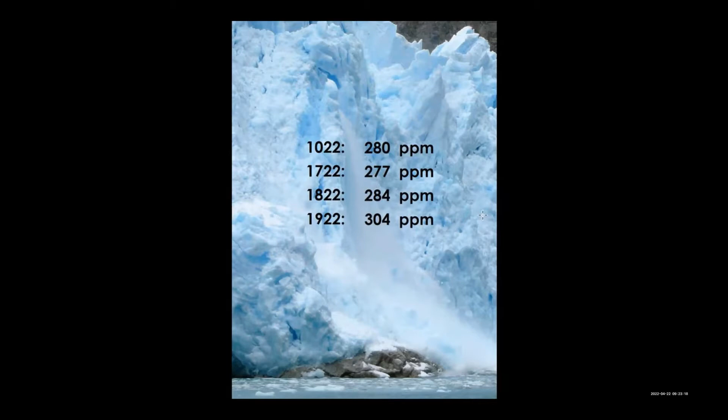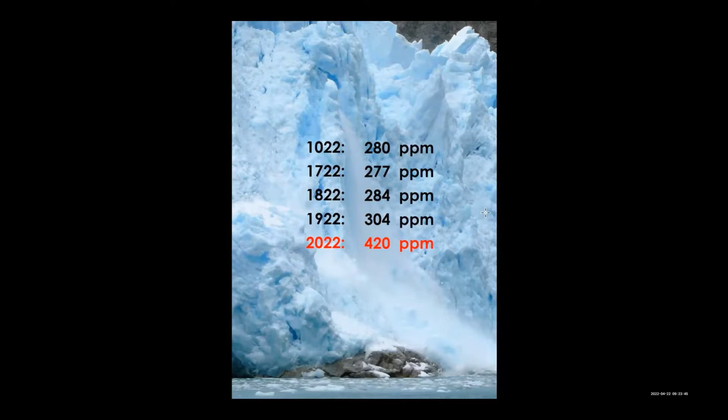In the early 1900s, for the first time in over 300,000 years, the concentration of carbon dioxide in the atmosphere exceeded 300 parts per million, that's ppm. Slide, please. Here we are 100 years later, and atmospheric carbon has reached 420 parts per million. 116 added since 1922. Next slide, please. In the 700 years prior to 1722, the increase was minuscule, just 3 parts per million. That was followed by a mere 7 through 1822. There was a slight uptick after the Industrial Revolution in the late 1800s, adding a total of 20 parts per million through 1922. But then it accelerated with an increase of 116 parts per million, reaching 420 this month.

100 parts per million were added in just the last 60 years at a rate we now know to be alarming. And with it, global warming followed suit, which we now know is its effect. Slide, please. Meta? Yeah. It was also 60 years ago in her book, Silent Spring, that Rachel Carson stated so presciently, the most alarming of man's assaults upon the environment is the contamination of the air, earth, rivers, and sea. That was 1962, and Silent Spring became a catalyst for the modern environmental movement. Its release spawned grassroots activities across the country, a new awakening that led to the first Earth Day on April 22nd, 1970. This year marks the 60th anniversary of Silent Spring, and today marks the 52nd anniversary of Earth Day.

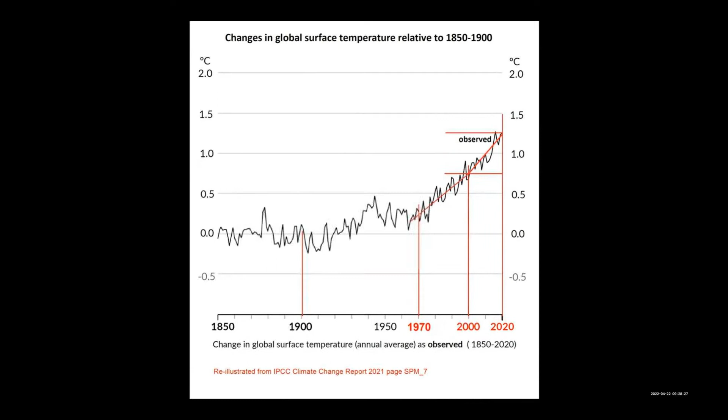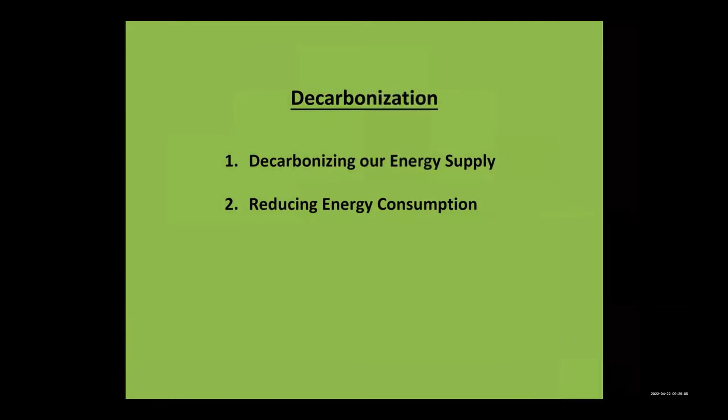Reducing energy consumption relies on the use of energy-efficient appliances and designing energy-efficient buildings. Energy-efficient appliances and equipment are the low-hanging fruit, merely a function of budget and availability. This is not particularly taxing to an architect's design. Designing energy-efficient buildings or retrofits is a more difficult task. It is an art form that requires engineering finesse.

But these solutions by themselves address only half the equation. They only address operating emissions. They ignore their own carbon footprint, the emissions generated while fabricating the materials and equipment, and those generated by constructing buildings and infrastructure. These are the embodied emissions. So how do these sources of carbon emissions, embodied and operating, relate to each other?

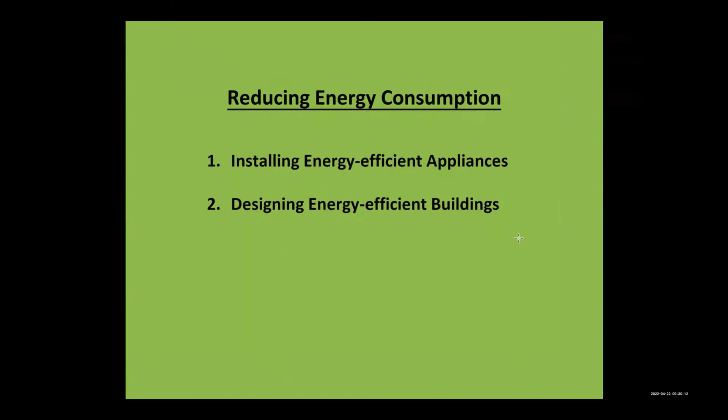Embodied emissions are the first tally of sustainability. Operating emissions are the second part of the equation, which brings us to the purpose of this seminar, to discuss the challenges and opportunities to decarbonize the built environment.

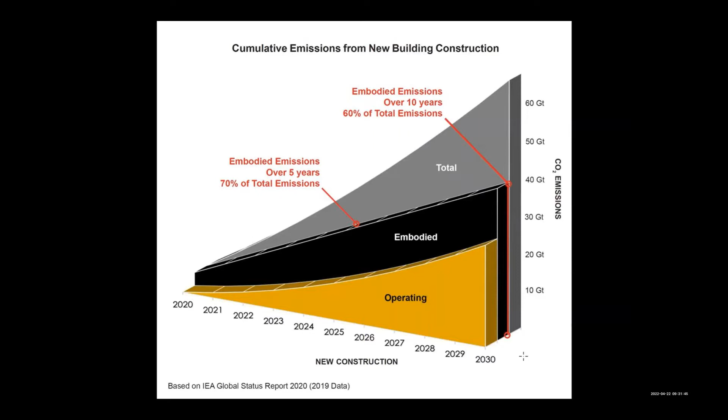Decarbonization is not just a good thing to do, like buying green, nor is it just an academic exercise in sustainable design. To understand the challenge and the opportunities to decarbonize, we need to know the facts. The facts matter. How many tons of carbon can we continue to emit before warming gets out of hand? How many tons are we emitting now? What is the status of our decarbonization?

What is the timeline? The answers can be found in these two reports, Climate Change 2021 from the IPCC and the Emissions Gap Report from the UN Environment Program. The emissions allowable to stay within the 1.5 to 2 degree targets can be found in Climate Change 2021. Let's take a look. Next slide, please.

This table addresses the remaining carbon budgets, the volume of carbon emissions allowable until net zero is achieved. Net zero means carbon emissions can be no higher than the amount of carbon removed from the atmosphere. Calculated from the beginning of 2020, each emissions allocation is tabulated with its likelihood for success from 17 to 83%. Given the consequences of continued warming, an 83% shot is the minimum we should shoot for. Would you bet the planet on anything less?

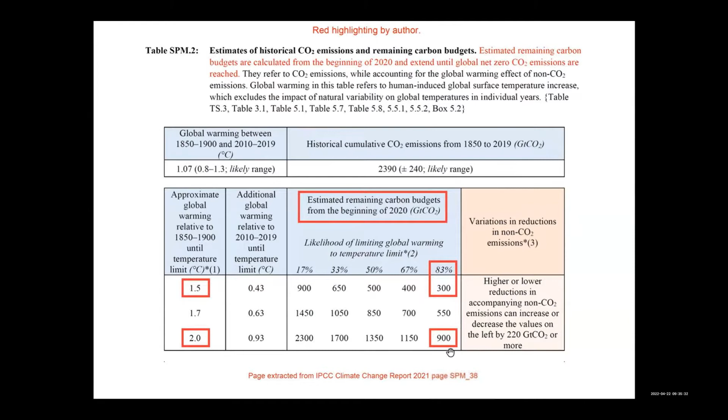Maida? Maida? Maida? Uh-oh. I think she might be having issues. Let's just give her a few seconds. Yeah, okay. Murphy and technology don't work well. So, letting her back in right now. Okay. Okay. Hi, everyone. Can somebody enable the screen sharing, please? Yes, give me one moment. Let's see. Sorry about this interruption. Okay, you should be able to do so now. Okay. We are here. Can you all see the screen? It's loading, but yes. Okay, one more slide. Okay. We're going to the next slide now, Bill? Yes, yes, please. There we go.

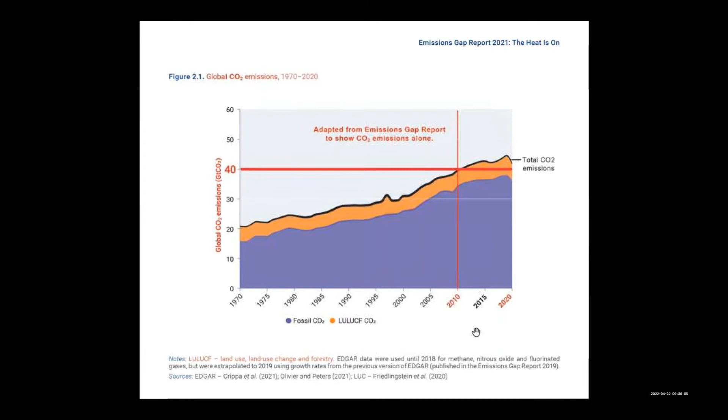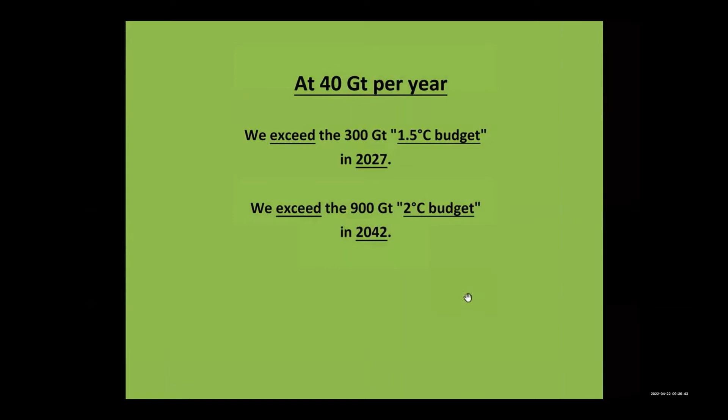At 40 gigatons per year, we will exceed the remaining 300 gigaton budget for 1.5 degrees in 2027, only 5 years from now. And with it, our 80% chance of success. We will exceed the 900 gigaton budget for 2 degrees in 2042. Yet net zero targets from the world's largest emitters are 2050, 60, and 70 at best. So let's see how our transition to carbon-free energy from renewables is coming along. Slide, please.

When it comes to renewables, like solar and wind, and for electrification, we are fed a lot of hyperbole about record growth, but numbers without context can be deceiving. Let's start with electrification. 26% of the global electricity consumed in 2019 was generated from renewables. 26% is fantastic progress, but here's the catch. Next slide, please.

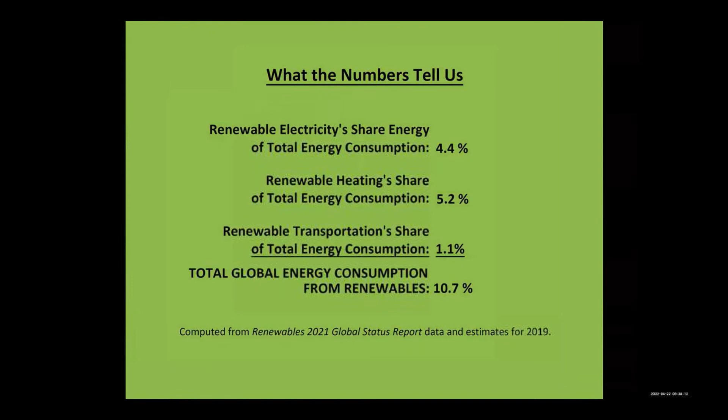Electricity accounted for only 17% of total final energy consumption worldwide. In other words, electricity from renewables was 26% of that 17% share, a mere 4.4% of the total energy consumed worldwide. Slide, please. It's a similar story for heat as well as transportation from renewables. In 2019, total energy consumption from renewables worldwide was only 10.7%. But unfortunately, one of those renewables is not carbon-free, biomass. Next slide.

It may surprise you that biomass is the largest source for renewable energy. Biomass fueled 40% of all renewable energy in the United States in 2019. Per BTU of energy released, biomass carbon emissions are actually worse than oil, and they're 40% greater than natural gas. Biomass energy generated 350 million metric tons of carbon dioxide in the US alone in 2019. Biomass energy consumption was twice hydro, twice wind, and 5.5 times solar. So how much of our energy is really generated from carbon-free renewables? Next slide, please.

Total carbon-free energy generated in the United States in 2019 constituted 14.9% of energy consumption. But 57% of that was from nuclear. Carbon-free renewables constituted a mere 6.4% of total US energy consumption. While reducing emissions has been a priority for more than 20 years, we continue to look to the future, relying on the future decarbonization of our energy supply, on future electrification. Our journey to net zero will take a lot longer than advertised. We are not well on the way to decarbonization. Slide, please.

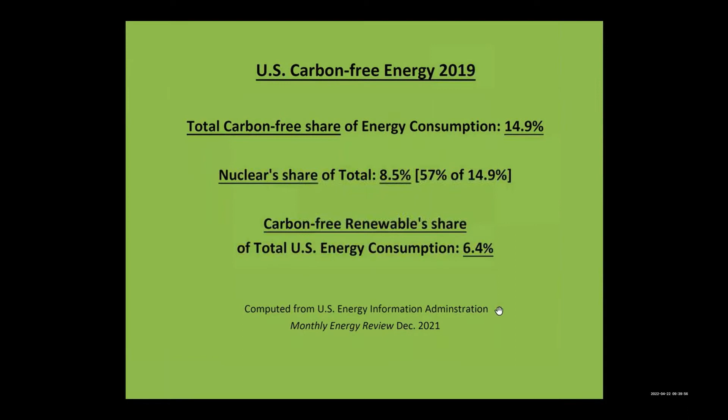In every other area of potential decarbonization, we are not doing enough. Regardless of all the green certifications, fawning articles in the press, and architecture competition award winners, with 40% of all energy-related emissions worldwide coming from the construction and operation of our built environment, we cannot wait for future decarbonization, a time frame based on wishful thinking. We must step up to the plate. Next slide, please.

This is why I spent the last 3 years writing Thwart Climate Change Now, Reducing Embodied Carbon Brick by Brick. Embodied emissions from construction materials and design methodologies have altered the picture, altered the nature of the challenge. They must be factored in framing every policy and incentive, even for materials and products manufactured elsewhere. Climate change knows no borders. CO2 emitted elsewhere impacts the climate in New York. Slide, please.

Now means over the next 5 years, 2022 to 2027. This is key to make over the next 10. We must buy time now by focusing on embodied emissions, by not taking them for granted as a necessary fact of life. Operating savings can depend on the weather, the economy, good practices, or the occupant's functional choices. They can also be improved upon in future years. This is not so with embodied emissions, which are locked in up front. Already emitted, they cannot be mitigated. Reducing new embodied emissions can be addressed immediately with the next building or infrastructure designed.

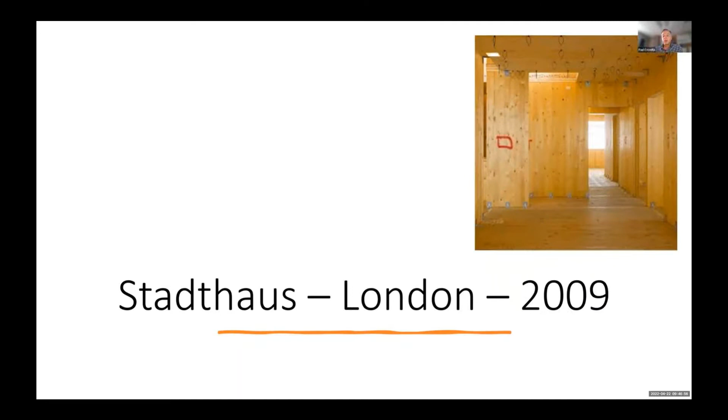So let me talk a little bit now about how we view the future of carbon-based impacts of our construction practices. And those carbon-based impacts include carbon-based impacts for both new and existing buildings. And so I'd like to start the talk about what the future for existing buildings looks like with a brief description of the recent history, if you will, of mass timber. And so mass timber construction was a project that was taken on in the late 90s in Europe to help understand if the forest resource could become essentially the key source for the structural systems in the future buildings being built in Europe.

But it really came into the public perception in North America with a rather iconic project that was done in 2009 in London by Andrew Waugh of Waugh Thistleton Architects. And it was called Stadthaus. And it was an 8-story building. And it addressed kind of the future of construction in a number of ways. Inherently, it addressed the future of construction in recognizing that it needs to be a future that includes carbon as a storage component in the buildings themselves.

And so it was a mass timber building. On the right, you're looking at the inside of what are referred to as cross-laminated timber panels. The total construction was a set of cross-laminated timber panels that were manufactured and customized off-site and then brought and assembled to site. The assembly itself of the 8-story building structural system had a 27-day duration, and it required 4 carpenters working on site during the process. So not only did this building represent what was potentially the future of construction materials, but it also represented a significant change in terms of the fabrication and delivery of construction projects.

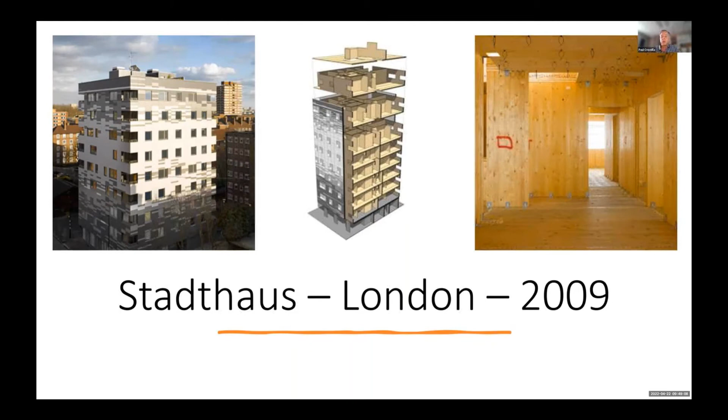And so with that, really across the AEC industries, people started to delve into and consider potentially what are the aspects of this new approach, this mass timber approach, that we can capitalize on as we think about our future construction trajectory. And so Meta, could I have the next slide, please?

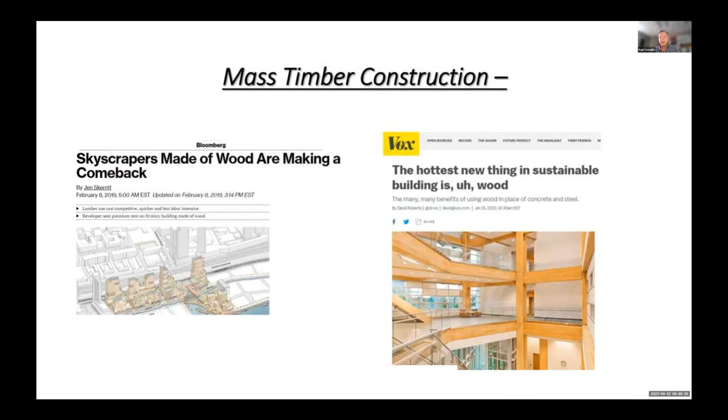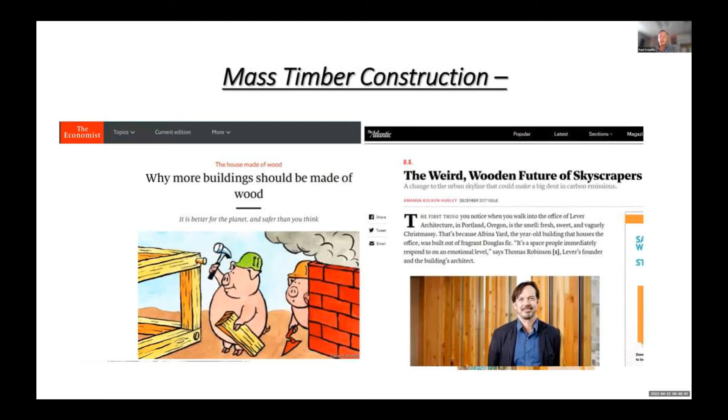And so sure enough, it began to pop up in the popular press. There were a number of aspects of it that seemed to capture the public imagination. And people who knew I was working in this began to say, hey, I've seen this in this publication and that publication. And sure enough, over and over, it seemed like popular opinion had moved to recognizing potentially there was going to be a different future for the way we built our buildings.

And so this future essentially combined a number of attractive components for how our buildings were to be built. And so significantly, large corporations that had made commitments to sustainability recognized that part of that commitment to sustainability would include the way that their built environment impacts were controlled.

So in announcing its new corporate headquarters being built in Bentonville, Arkansas, Walmart not only made a commitment to actually using forest products as the materials for construction, but also helping develop a regional forest economy within the state of Arkansas and beyond.

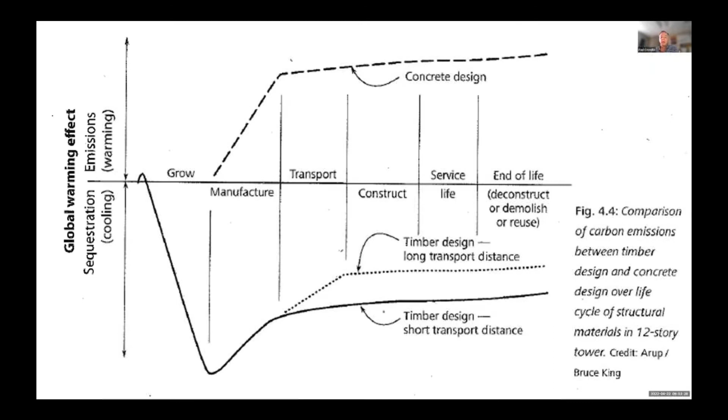You'll notice all the way over on the left, the process of carbon sequestration. During this growth phase in the forest, is a key principle fundamental to considering the environmental benefits of mass timber construction: really understanding and being able to optimize the way that the carbon impacts of the forestry practices are done. You can see the huge drop, or carbon sequestration, that we get from that.

To the right of that, you'll notice that both for reinforced concrete and mass timber, the lines begin to rise, but there's a more substantial rise for reinforced concrete. So there's an additional benefit from mass timber construction, due to the reduced carbon required for fabrication of the products, as opposed to the carbon invested in creating Portland cement and the rest of the concrete components. We refer to this as substitution benefits. So sequestration, what happens in the forest, and substitution, the change in processes, are both considered when we look at the overall impact of carbon processes.

However, there's one other significant potential impact of this total approach. So next, Meta, if you could give me two additional clicks.

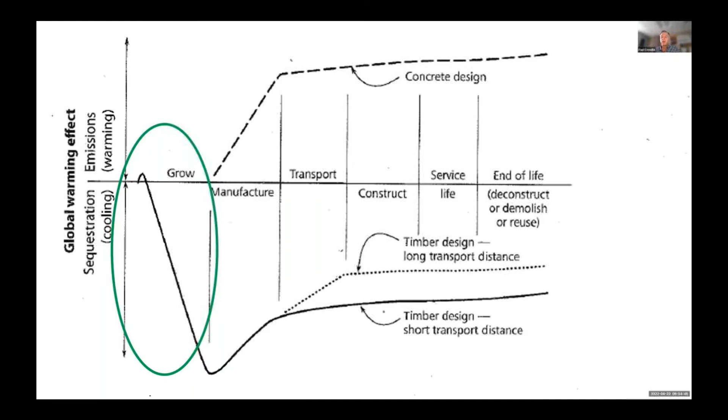It was pretty clear from the layout of where we're headed in terms of carbon that it's not enough to just think about embodied carbon or operational carbon initially. We really need to view the future we're leaving for our next generations, and ensure we're leaving them the opportunity to continue to enjoy what we've been able to enjoy with the natural environment.

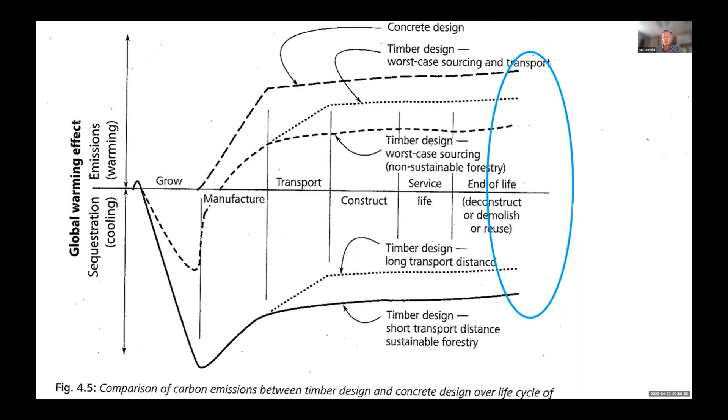So at ESF, for new construction, we've focused very closely on this initial stage and this final stage for our current research. With the next slide, I'll begin talking about what we're doing with that initial stage - what is happening at a forest level, particularly in our New York State or regional conditions.

Then there's a period of time just after that during which the stand takes to recover. As new seedlings are planted and forests begin to grow, the rate of carbon capture is not as rapid as that of a more mature forest.

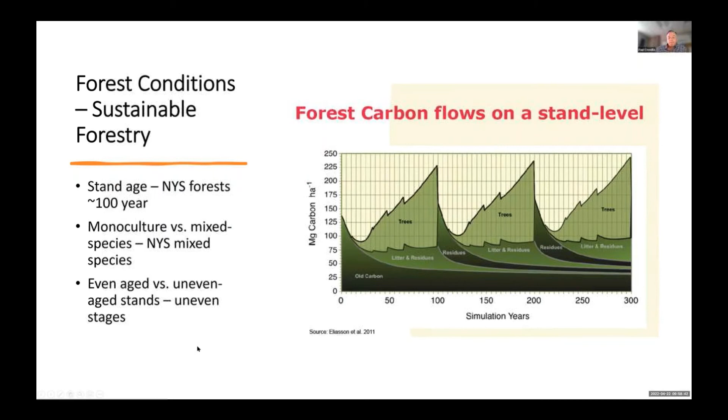The initial colonization of the United States included an interest by the British Navy in coming to the forests of the northern United States to harvest eastern white pine because of their size, stature, and their ability to be used effectively for creating masts for British warships. So what we're talking about here is a species that's been long established in this region. We've got over 10 billion board feet of this timber.

And most importantly, under current harvesting practices, as each year we remove 1 unit of biomass from the forest, nature is replacing that annually with 2.6 units of additional growth. So we actually are currently using our forest in the exact manner shown on that previous graph, where year over year, they are effectively carbon capturing ecological systems.

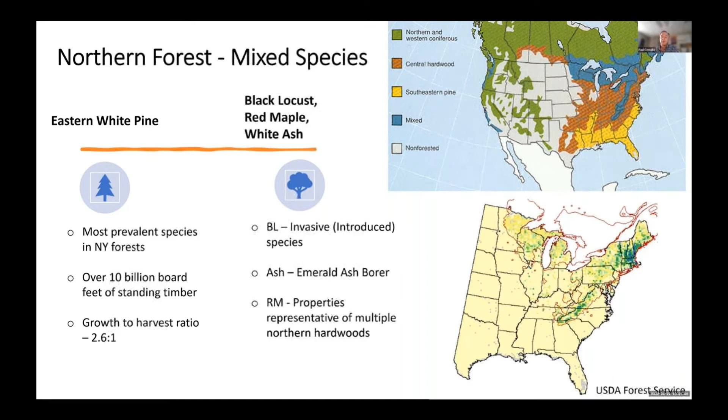And then we're also working with red maple. And so red maple is shown as a hardwood, and you can see in the upper diagram on this slide, that blue area showing mixed ranges of hardwoods there. And so New York State is well endowed with a significant amount of hardwoods like red maple that could be used potentially for products as well. And so Meta, if you will head to the next slide.

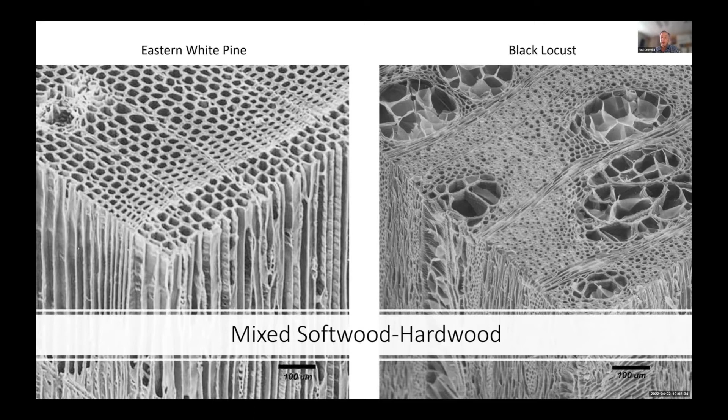So to understand what we should be building with, we really want to take what the forest has given us and make sure that we're using it appropriately. So these are micrographs of the cellular structure. On the left, you're looking at eastern white pine, and on the right, you're looking at black locust. Eastern white pine distinguishes itself as having one of the lowest densities of any of the softwood species. Black locust, on the other hand, has one of the highest densities of any of the hardwoods. And so what we've been doing with each of these species is putting together mass timber products that will optimize these performance characteristics. And so Meta, if you can give us the next slide.

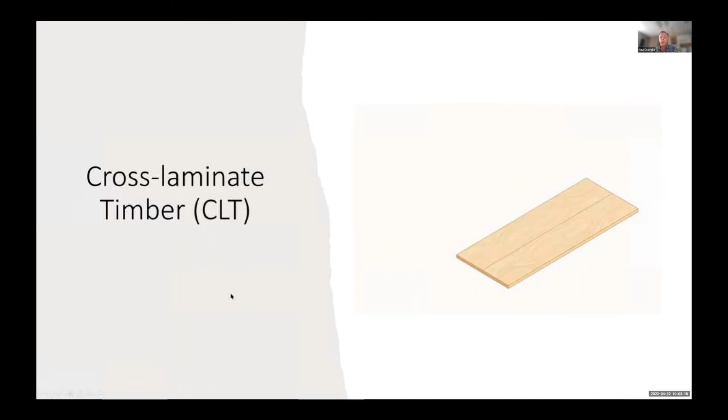So traditionally, mass timber panels have been created using a process referred to as cross-lamination. And as you can see here, this requires layers of parallelly placed boards and then subsequent layers that are placed orthogonal or perpendicular to the lower layer. And so this is done typically with monoculture species, typically with softwoods that are harvested in an industrial fashion. And then using industrial thicknesses and supply chains, these products are currently what dominate the mass timber construction industry. If you'll go to the next slide, Meta.

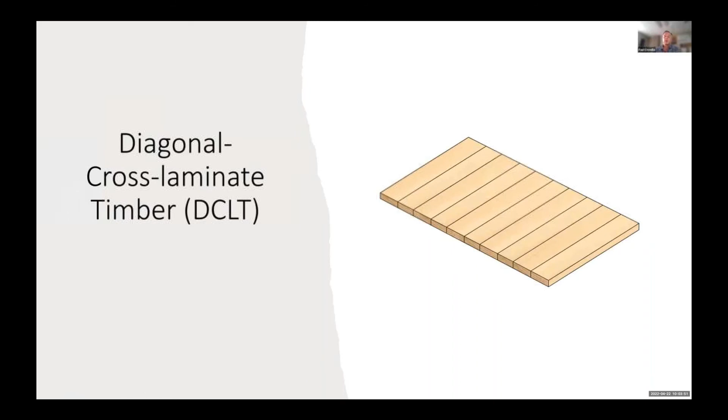We've been looking at both cross-laminated timber as well as diagonal cross-laminated timber, or DCLT. And in this instance, what you'll note is that the subsequent layers are not all laid in a perpendicular fashion, but actually we're able to consider the properties of the material, both in terms of its strength and its dimensional stability, and seek to optimize the way we're using the fiber in the final product to give ourselves improved performance over CLTs. And so just to help you all wrap your heads around what that might look like, I'll just show you a quick video, Meta, if you would.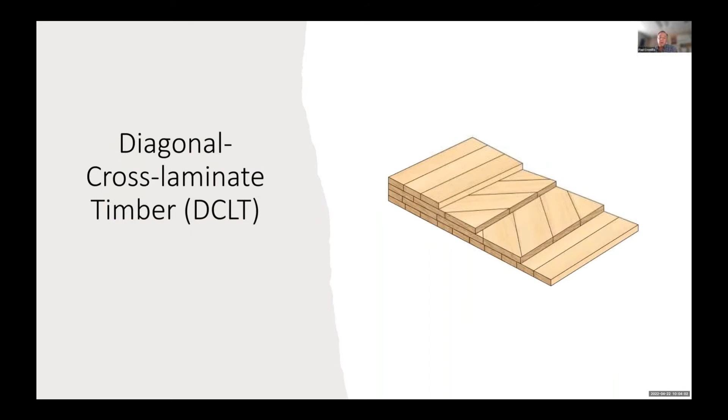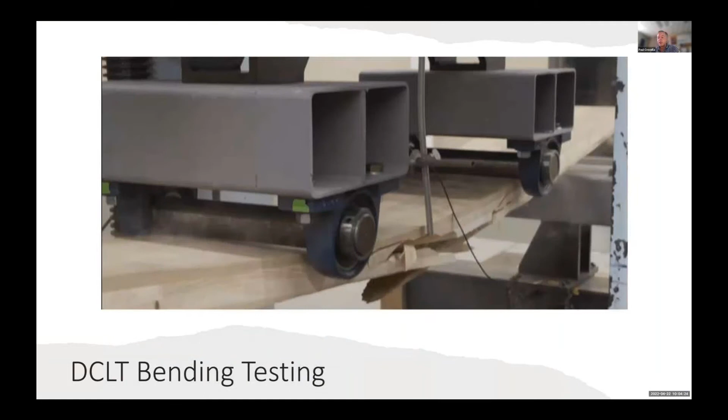And yes, so if this plays, you can see, okay, what you're looking at is panels that are made with hardwood, black locust, outer layers, outer lamina, and then inner lamina, diagonal lamina of softwoods. And we're showing that the performance of these panels actually exceeds by anywhere from 30 to about 60% the performance of current products on the market of equal thickness.

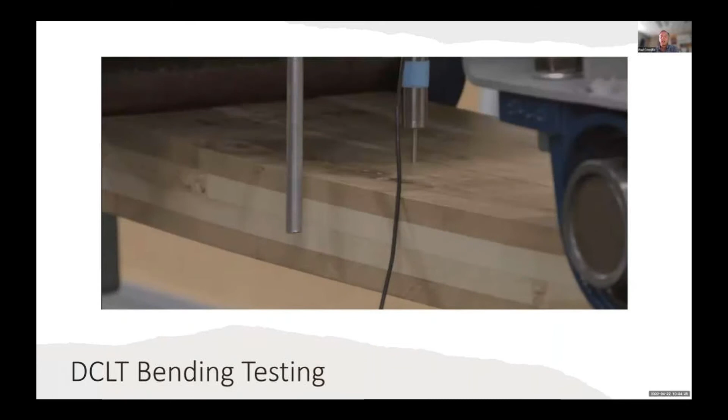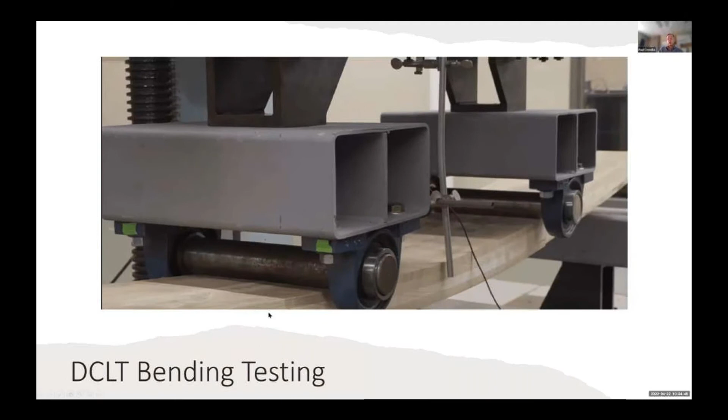So although we don't have today a large industry in New York State producing these products, we've been pleased to be able to show that New York State has the resources which can be harvested sustainably to produce products fit for the future use. And so with that, I think I'm running up toward the end of my time. I'll touch on just a few other efforts that we've got at ESF. So Meta, the next slide.

So we've been looking at what will happen at end of life. And really there's a couple key things that we should be doing now with mass timber construction to assure that we've got the opportunity for end of life resurrection, as we'd like to call it. And so those include capturing the information during the design and construction phase. We want to ensure that the architects understand exactly what's available, the engineers know the material properties, and the builders understand the construction processes so that they can put together accurate bids when the time comes for deconstruction.

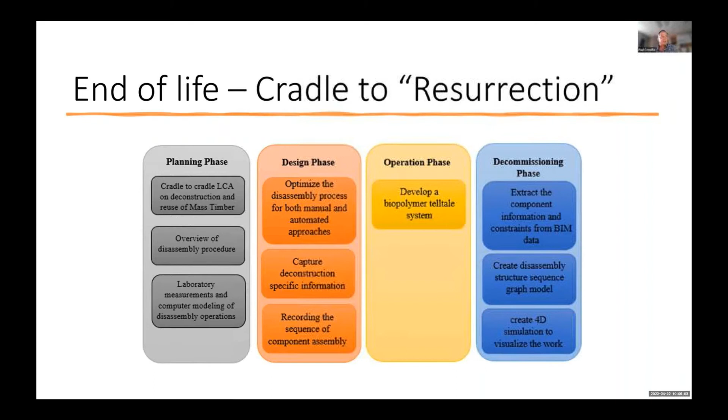We're incorporating biologically based structural health monitoring systems. So these are indicators made with biomaterials that will be able to show the structural history of the panel and ensure architects have confidence that it hasn't been damaged during its use. And then at end of life, we're developing methods to use automation, as we recognize the future will probably allow for less and less labor to be used. We're ensuring that automation will be able to be used efficiently for the separation and deconstruction of those materials. And so with that, that really wraps up our current work in regard to new construction.

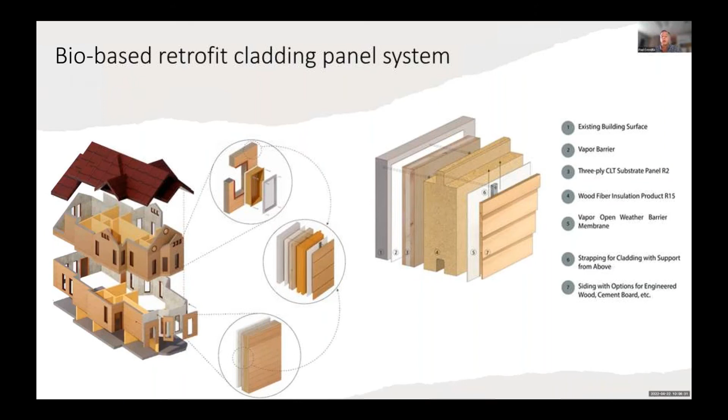I'll just touch briefly. I think Gabrielle will be sharing quite a bit about the potential for renovating existing buildings. And so I'll share that we've been working on a project that's built around a bio-based retrofit cladding system. And so you'll note on the right, we've got a thin 1.5" CLT panel as a substrate, and then we've got a wood fiber insulation product overlaying that. And next slide.

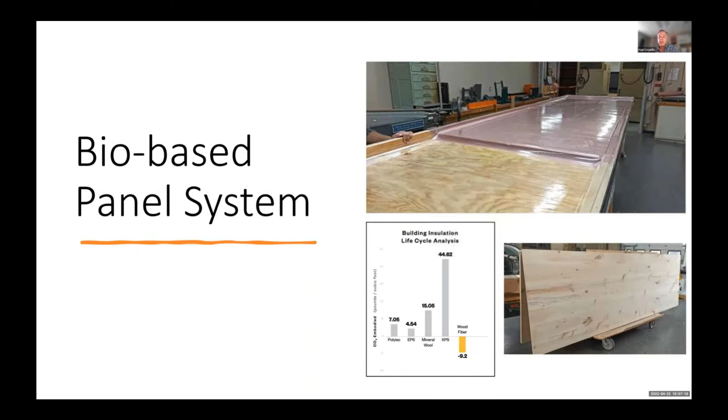And so these panels can be fabricated at scale. And as you note in the diagram shown in the middle left, wood fiber insulation, a product commonly used in Europe and about to be produced regionally in the Northeast and Maine, starting in 2023. Wood fiber insulation is the only insulation product currently that is carbon negative throughout its manufacturing process. And so the panels, if you'll give us the next slide, provide all the functions of envelope. And then if you'll provide the next slide, Meta.

Being a bio-based material, we're very concerned about its long-term durability. So unlike petrochemical products, this bio-based product has the potential to, when installed, offset 6 years of energy savings for the building. So the panel installed in the building will provide a year of energy savings for each year that it remains on the surface of the building, but the embodied carbon captured in the manufacture and application of the panels to the exterior surface of the building can provide an additional 6 years of energy savings for the building. So we want to ensure that potentially this path, if provided, will have long-term durability. And so we're moving toward mock-up scale production and modeling of this as we move ahead.

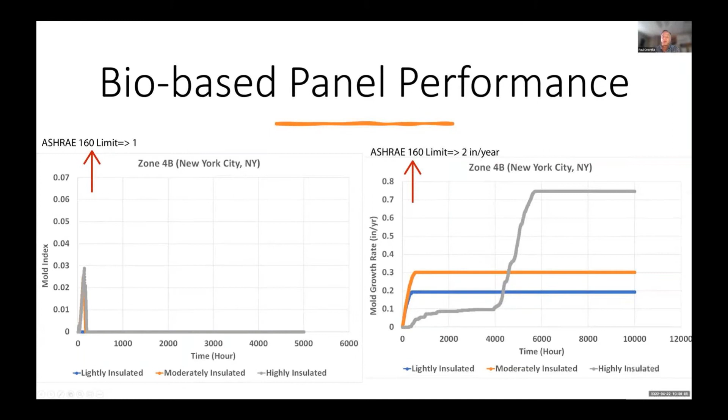And so with that, I hope I've given you a pretty clear picture of how we're trying to work in concert with the forest and ensure that we're doing right by what nature has given us to work with as a building material that embodies carbon.

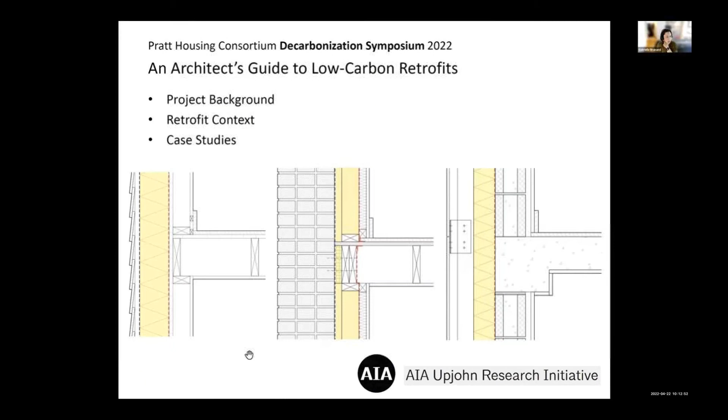And we felt like this is a really great challenge to architects, and that there wasn't maybe a lot of capacity within our community of designers to actually tackle some of these projects. So that's the goal of the book, to kind of spread that knowledge. Next slide.

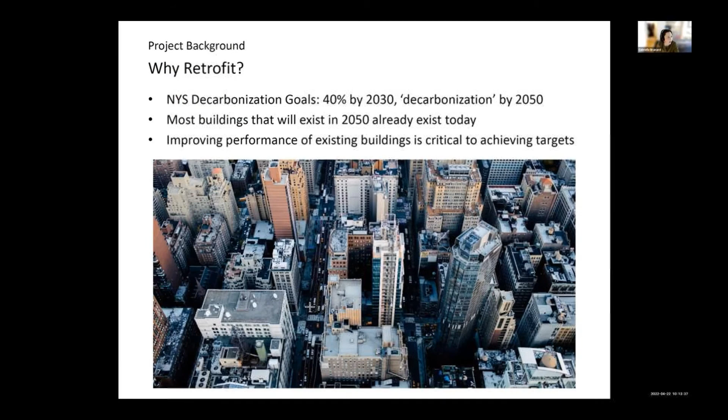So this is probably of no surprise to this group. Buildings are a big part of energy use, particularly in a place like New York City. Our state has these very ambitious decarbonization goals. We say we're going to reduce energy use from buildings by 40% by 2030. That's really soon. And decarbonize by 2050. Most of the buildings that we're going to need to use to meet those goals already exist. So it's really critical that we address this existing fabric if we have any hope of achieving these targets. Next slide.

There are a number of existing resources on retrofits. This is something that the DOE has been working on for a while through its Building America program. That program is really focused on single-family housing. When you look at those publications, they are very focused on spray foam as the solution. So it's starting to feel a little dated now that we're having a more sophisticated discussion about embodied carbon. But it's important to acknowledge all the research that has gone on there.

There's a number of city and state NGOs, not just the excellent BEEx in New York, but also Mass Save in Massachusetts. There's some interesting efforts also in Maine, Nova Scotia, folks who are kind of pushing this on the policy level. Their recommendations tend to be more policy driven and less the nuts and bolts of details that architects are interested in.

And then there's a lot of material out there from industry, which is great, but we need to acknowledge that a lot of that is typically biased towards a particular system or typology that folks are trying to sell you. So for example, there's a great retrofit guide from a particular group of insulation manufacturers, and every detail has the particular insulation that they're trying to market. So it's important to think about where the information is coming from, and our interest was in producing something that was basically not sponsored content. Next slide.

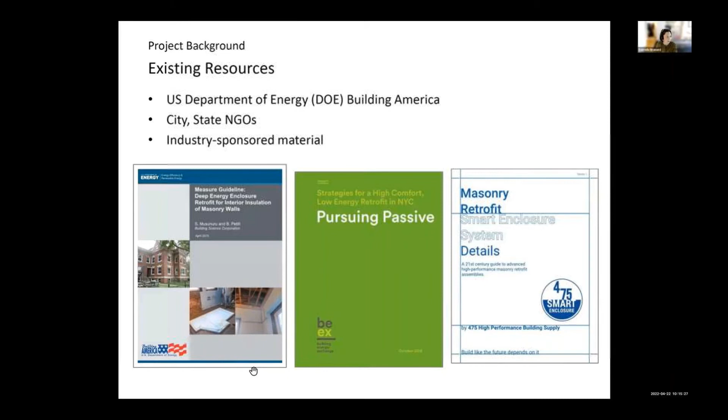So our guide in this, one of our things that we're kind of hoping to emulate, is this really excellent book by Alison Kwok, Don Corner, and Jan Fillinger for passive house details. This is for new construction, but the focus is really on producing these high quality, very clear drawings of architectural details, and we felt like doing something like that for retrofit could be potentially very useful. Next slide.

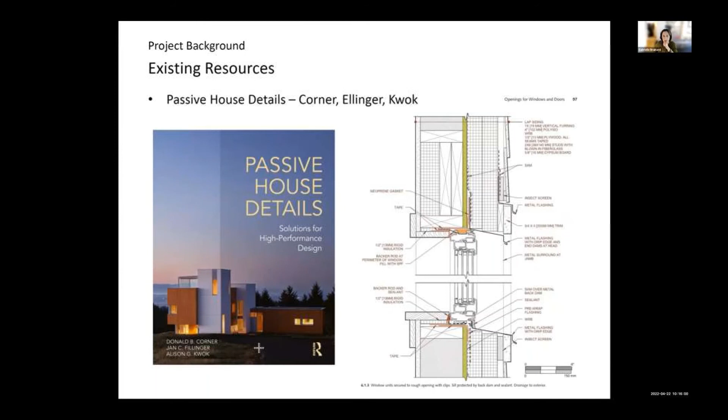So the way that we've organized our thinking around this is around housing typologies. And one of our observations is that, if we look at historical developments in the United States, we have a number of very similar typologies based on the materials that were available at the time that many of our towns and cities were built. So we see that we have common building types ranging from Maine to Minnesota. And these are buildings that are at the vintage that they're likely in need of retrofit. Many of them have probably been retrofitted or changed a little bit already. Next slide.

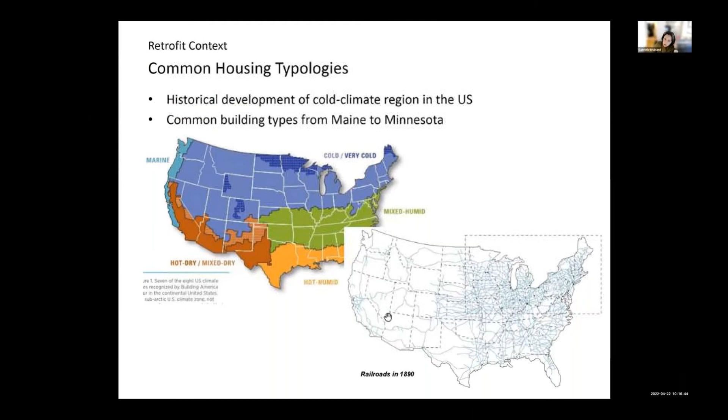And our thinking about typology, we kind of broke it down by structural material, vintage, and size. We did some research for NYSERDA, where we went into this in more detail for New York State. But basically, we're looking at wood frame buildings, masonry buildings, and you can see that there's some differences, particularly when we get into post-war mass masonry or transitional masonry buildings, where we have very large developments of buildings that are all very similar, which is a really interesting opportunity for retrofit.

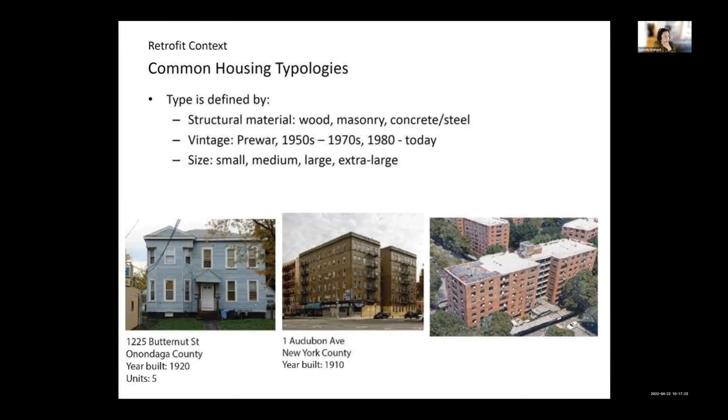Lauren, next slide. I thought you were scuba diving somewhere.

And then, it's really important to be cognizant of the building science implications of retrofitting, and I think this is one of the most challenging aspects. You can get into a lot of trouble if you create a highly insulated building without dealing with other aspects of building science, particularly air tightness and ventilation. Oh, no. So this is something that we're going to deal with on a case-by-case basis. In the book, it's sort of hard to address something as complex as building science as a guide, but it's something that will be specific to each case study. Next slide.

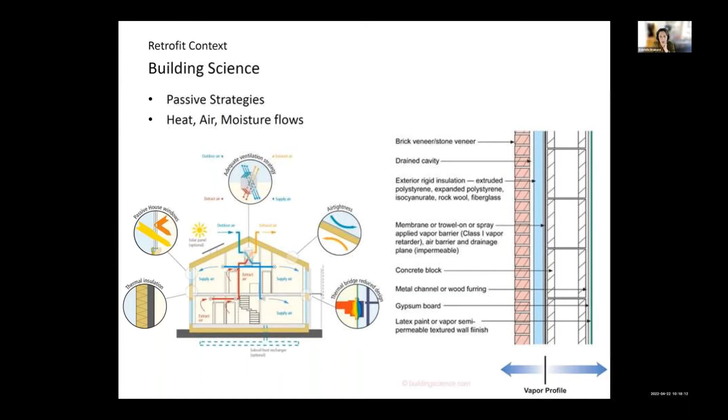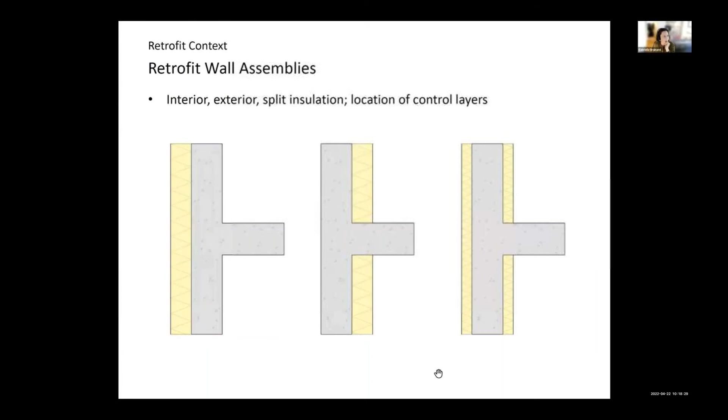And the basic thinking of how do we affect these retrofits: you can insulate on the inside, insulate on the outside, or do a little bit of both. And we're going to dive into the case studies and see some examples of these strategies. Next slide. So I'll go through a small, a medium, and a large, looking at wood frame, masonry, and also some combination of brick and block, all from New York City.

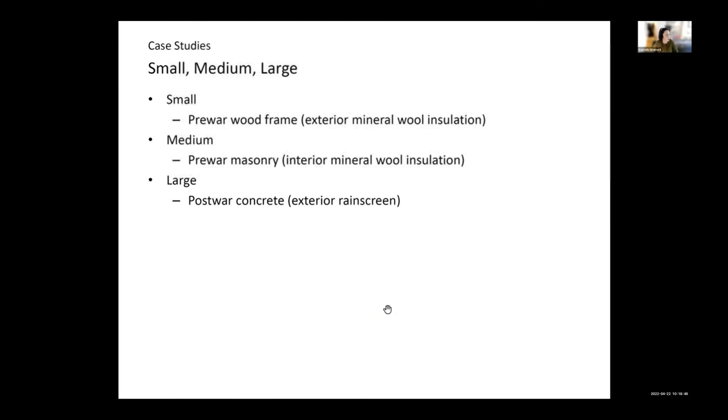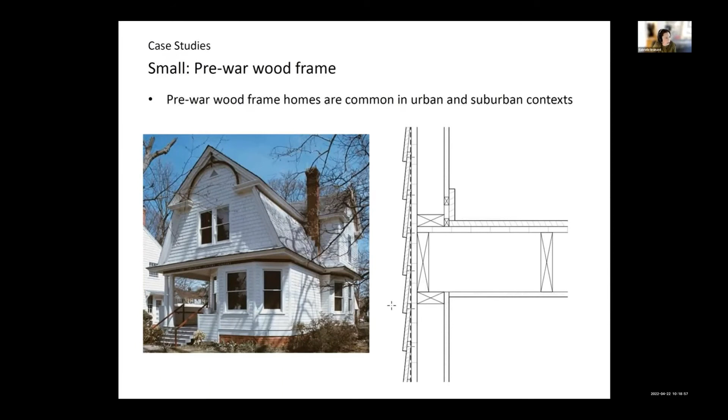Next slide. So when we're dealing with these small wood frame homes, as some of you might know, we actually have a number of these in Brooklyn. Next slide. The options are sort of to try to insulate inside between the studs, or to remove the cladding and apply insulation and air barrier to the exterior. Obviously, there's many different materials that you might consider for this. We're going to see an example using, I'm not sure if it's mineral or wood fiber. Next slide, please.

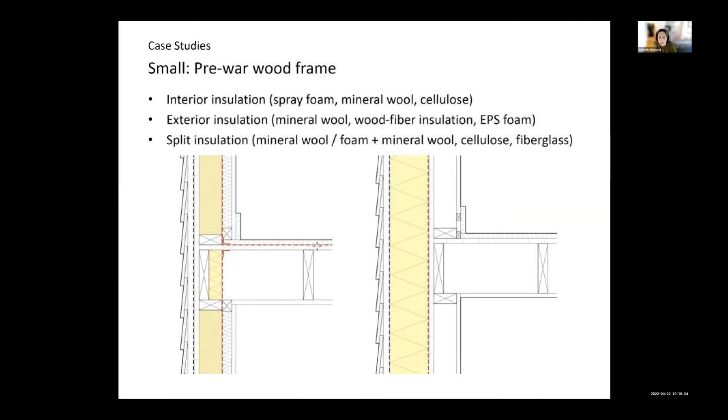So this is a case study from Ditmas Park by Duncan Architect. This is actually a historic district. The existing building dates from, I want to say, the 1920s. It actually ended up with asbestos shingle. Yeah, I believe this house was built between 1902 to 1914. Next slide.

So the architect made the decision to retrofit this to Passive House standards and basically did a complete gut because there were other things that needed updating on the interior of the building. But they basically removed the cladding, installed new control layers and insulation, and then replaced the cladding and maintained the appearance of the historic district, which can get a little bit challenging because if you're adding insulation on the outside, you're actually changing the geometry of the building itself. Next slide.

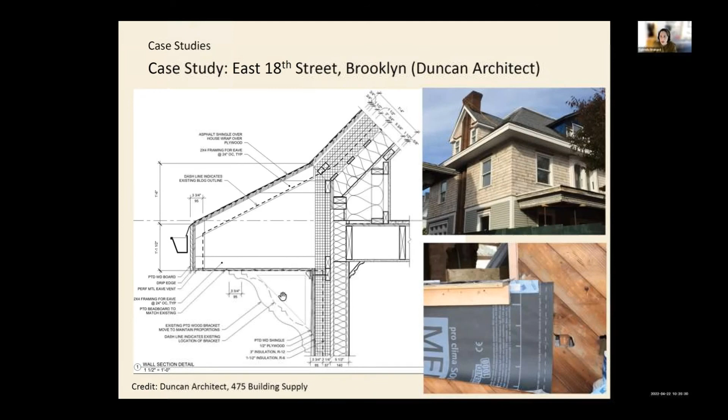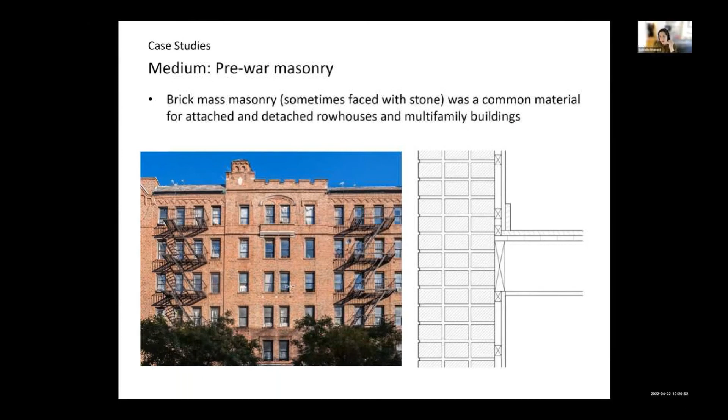Another example, this is a really interesting one of pre-war masonry. So New York City has a lot of mass masonry buildings, let's say 6 or 7 stories or less. Many of these are co-ops. This would also apply to row houses. Next slide. These strategies would also apply to row houses, but again, you have the option of adding the insulation and air tightness on the interior or doing it on the exterior.

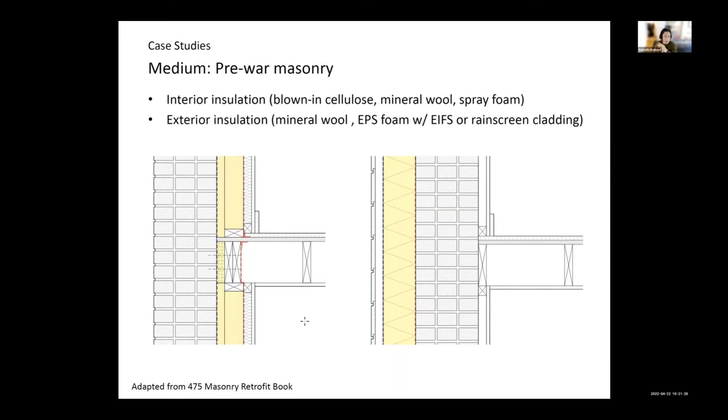Often in these brick buildings, putting it on the interior can be preferable if there's ornament on the outside that you want to preserve. On the flip side, putting it on the exterior would help out if you've got really tight interior clearances where you need to maintain minimum room sizes and that sort of thing. Next slide.

This case study is again in Brooklyn, also in Ditmas Park, of a co-op, where the co-op actually had control over a couple of units that had been rentals, and one of those units was vacated, and they decided to do a kind of standalone Passive House level retrofit of this unit. So next slide.

So basically, they encapsulated this unit. They insulated the interior of the brick wall, and they also put insulation and air tightness in the ceiling and the floor, which is great for sound insulation as well. Prior to adding the mineral wool insulation, they did a liquid applied air barrier on the brick. Next slide.

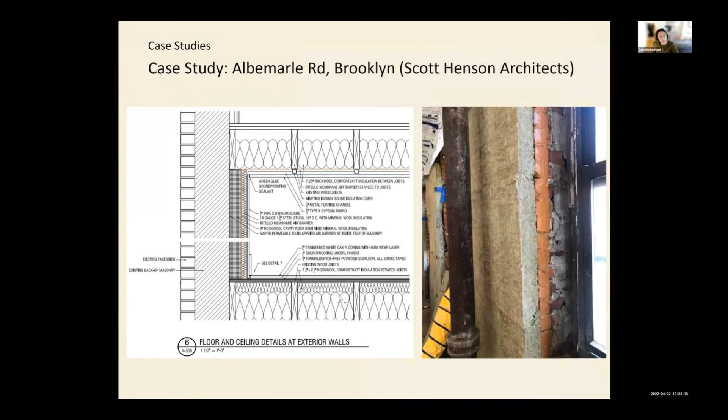And then this is some construction photos, and then an interior variable vapor control layer and new mechanical system. So this particular unit now has its own ventilation, heating and cooling system separate from the building. Really interesting approach. It gets at the challenges of what do you do in a co-op where you've got a lot of folks that are tenants or owners who are not easily moved or displaced during construction. You might have to do units one by one. Next slide.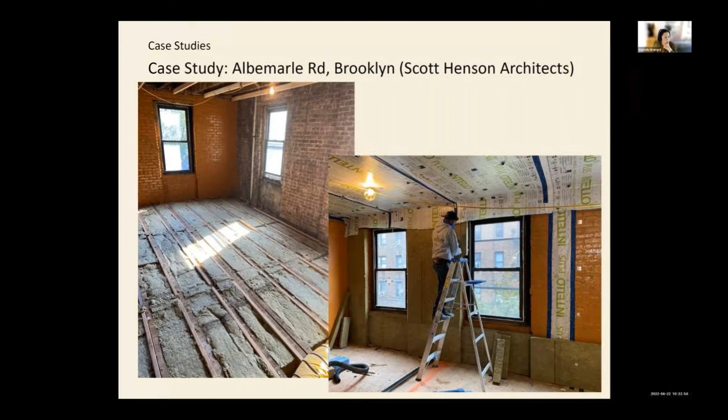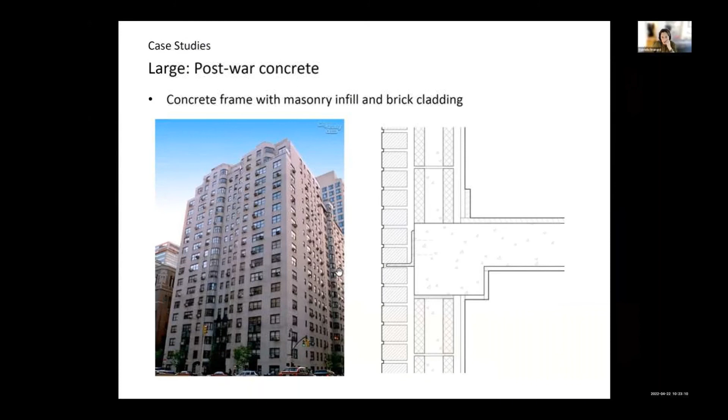And the last example is a large, again, co-op concrete and masonry building on the Upper East Side of Manhattan. Next slide. So again, the choice to insulate either the interior or the exterior. Next slide. This particular building is being renovated by Rogers Partners, and they had a lot of issues with deteriorating brick. So they had brick falling off. It was an issue for FISP, formerly known as Local Law 11.

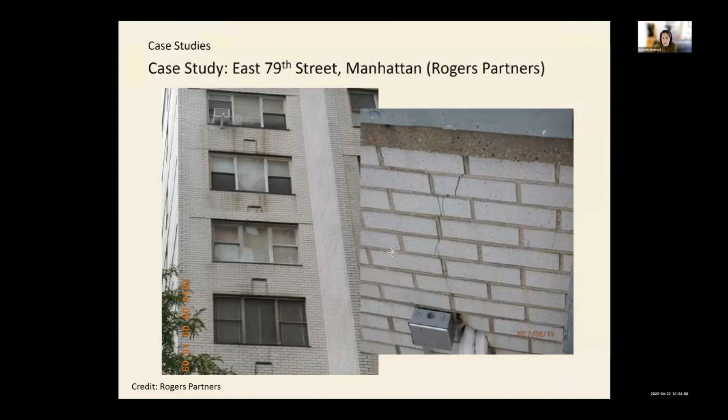They had kind of a permanent sidewalk bridge, and then Local Law 97 came along, and the co-op said, okay, we've really got to do something about this because this is not sustainable financially for us. We need to stabilize this facade, and we need to deal with the potential fines that are coming down the road with Local Law 97. Next slide. So this is some issues of the deterioration of the brick. Next slide. A lot of these buildings unfortunately are poorly constructed, and we're seeing the results of this 50 years later, 60 years later.

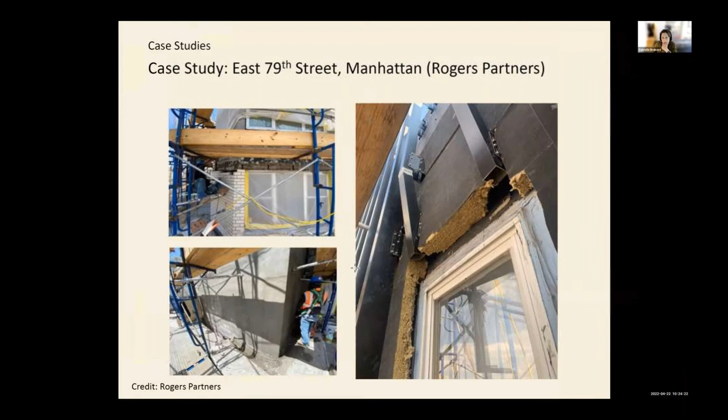The co-op made the decision to remove the brick, essentially take it back to the concrete block, install exterior insulation and a new cladding system. So it's basically a rain screen system. Next slide. And it's a ceramic tile rain screen. So they totally changed the look of the building, in addition to dealing with some of the issues they had with the facade deterioration. And interestingly, they didn't update the windows. They did a very careful cost-benefit analysis of this because the cost was being borne by the building owners, the co-op members, many of whom were on fixed income.

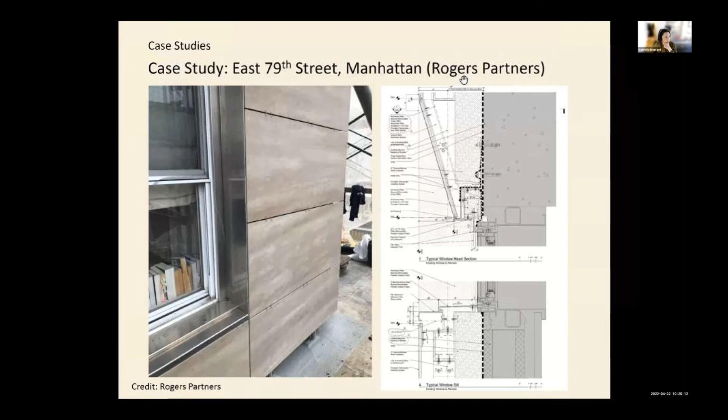So I think this highlights some of the challenges also of how do we actually retrofit these large projects and how do we finance it? Because a lot of folks in these co-op buildings in particular are not planning on these major renovations as part of their capital plans. Next slide.